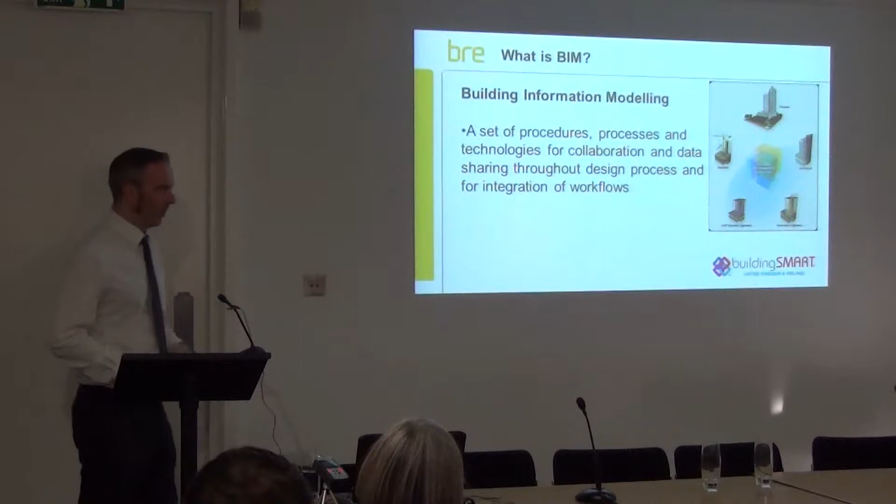So the types of data that you share in a building information model - I guess this diagram is the generic way of looking at BIM, or the building information model, and the collaboration between the different disciplines that collaborate towards that model. It can be anything from geographic information, spatial relationships, crowd flow, manufacturer details.

But more importantly, one of the important things that building information modelling formalises is the sharing and capturing of how this information is used throughout the process, using standards and protocols that are coming into use.

A building information model is meant to be used throughout the whole design process, from the building inception right through to whether you decide you do want to build this building or not, right through to the facilities management guy at the end who wants to change a light bulb in the building or make the room less hot.

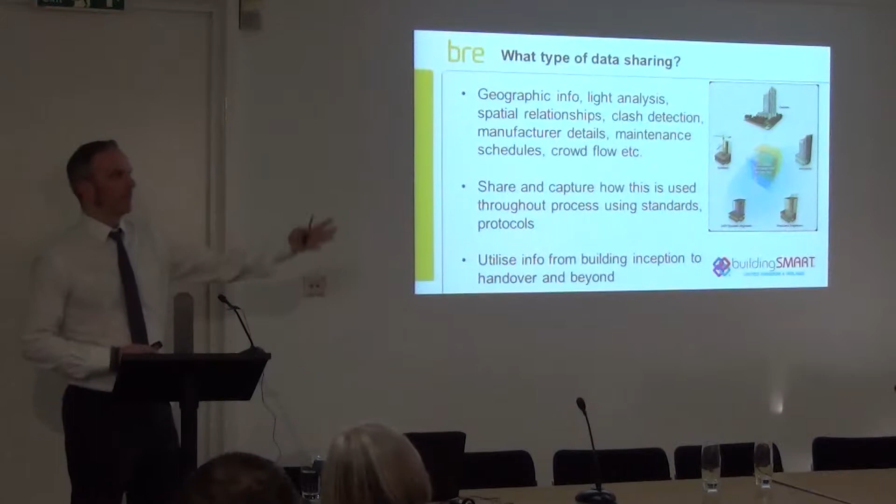So why do you need building information modelling? Well, in the UK, a big impetus for it is that the UK government has specified that it has to be used on all government projects over 5 million by 2016.

Francis Maude's statement, which you can find on the bimtaskgroup.org website, says the government's 4-year strategy for BIM implementation will change the dynamics and behaviour of the construction supply chain, unlocking new, more efficient and collaborative ways of working. This whole sector adoption of BIM will put us at the vanguard of a new digital construction era and position the UK to become world leaders in BIM.

Behind that is this rather plain document called the Government Construction Strategy, published in 2011. The central tenet was to reduce capital costs and the capital and carbon burden from the construction and operating of the built environment by 20%. A key part of that was that collaborative BIM, with all project asset information, documentation and data being electronic, has to be used on projects over £5 million by 2016 by the government.

So by 2016 this has got to be implemented. But one of the things is that we're already in 2013 - so how far are we towards that goal?

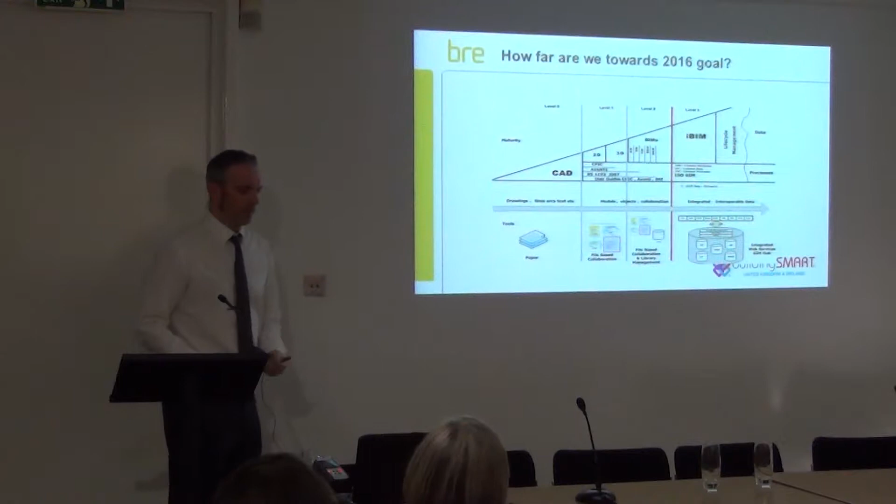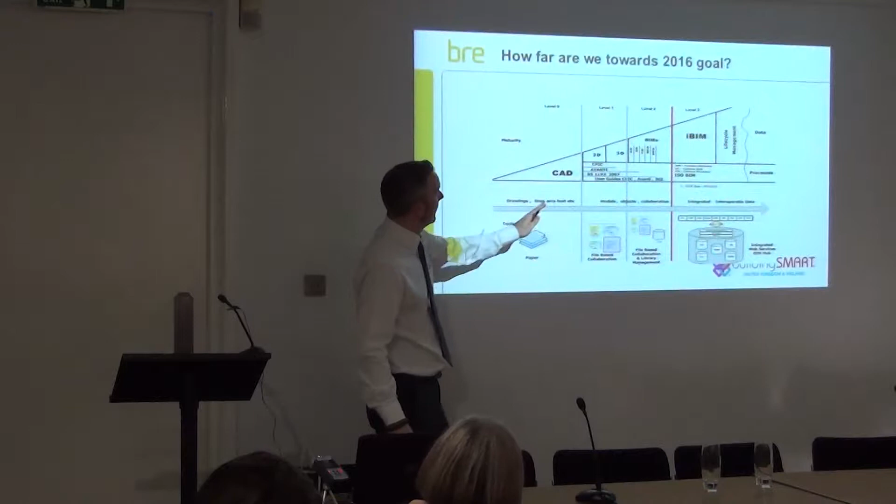Well, if you've ever looked at building information modelling, you'll probably have seen this diagram. It's called the Bew-Richards diagram. If you haven't looked at BIM yet and you're going to, you'll become thoroughly sick of this diagram because it's in every single presentation there is. But the idea of this diagram is to show the evolution of BIM towards level 3 and beyond. The government has specified that level 2 is where people will get to by 2016.

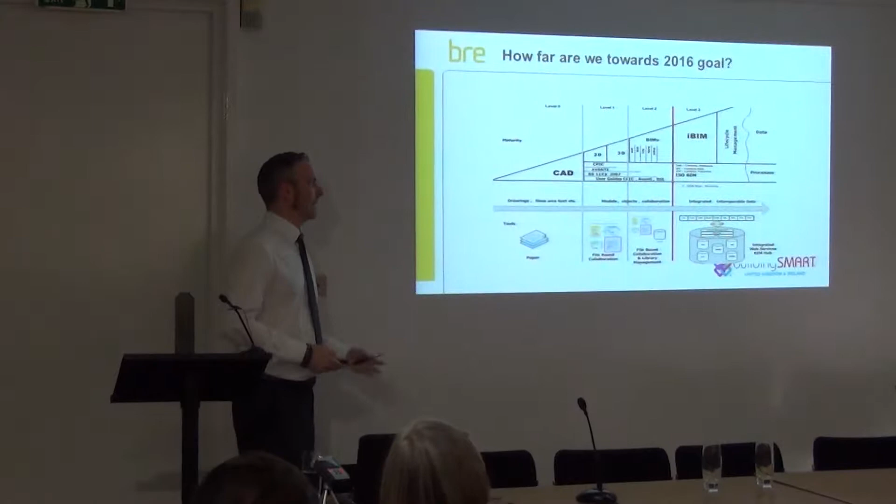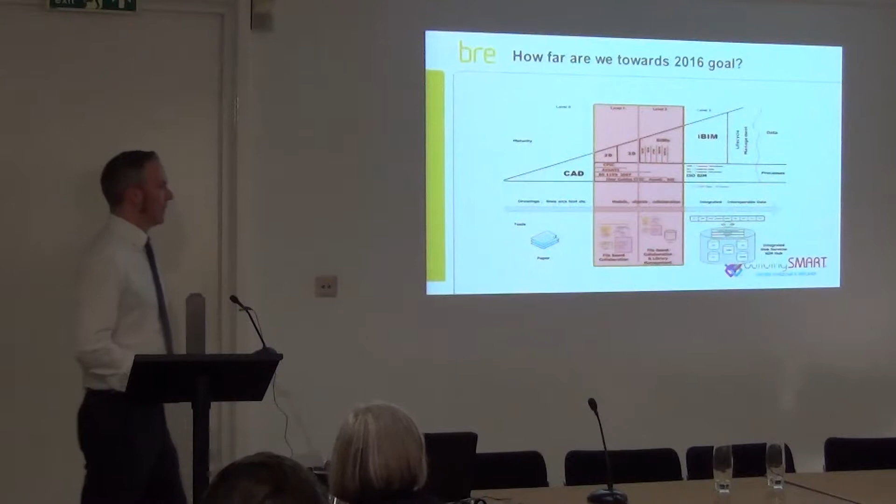Level 2 means every form of documentation, every model has to be electronic and in an interchangeable electronic format by 2016. Where we are just now, I'd have to say, a bit of a cop-out, is somewhere in that red box. That's really because there are bleeding-edge market leaders who are possibly beyond that, but then there are people catching up.

One of the things I said about building information modelling is that it's about protocols and standards. You can see this has really been taken up by the UK construction industry in terms of the protocols and standards that have come out recently.

For instance, you have the UK government's PAS 1192 document, a specification for information management on building information models. You have Uniclass, which I've been involved in myself, the classification system for the construction industry. You have the RIBA, who released the new RIBA Plan of Work 2013, possibly the biggest overhaul of the Plan of Work since its inception 50 years ago. And then you have a myriad of other documents from the Construction Industry Council, like the CIC BIM protocol.

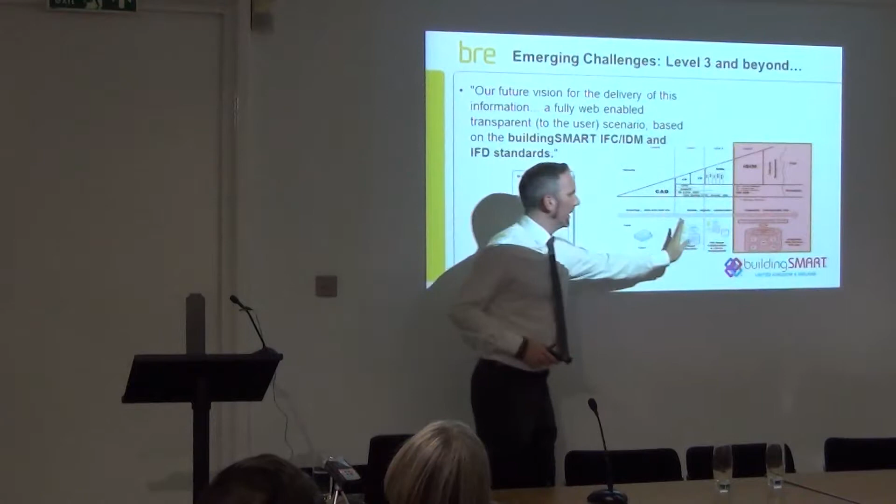That's just been renamed the Building Smart Data Dictionary, which rather ruined my slide since I had that nice diagram there. One thing I think with building information modelling is that the government has this set plan up to level 2 - everything has to be digital by 2016.

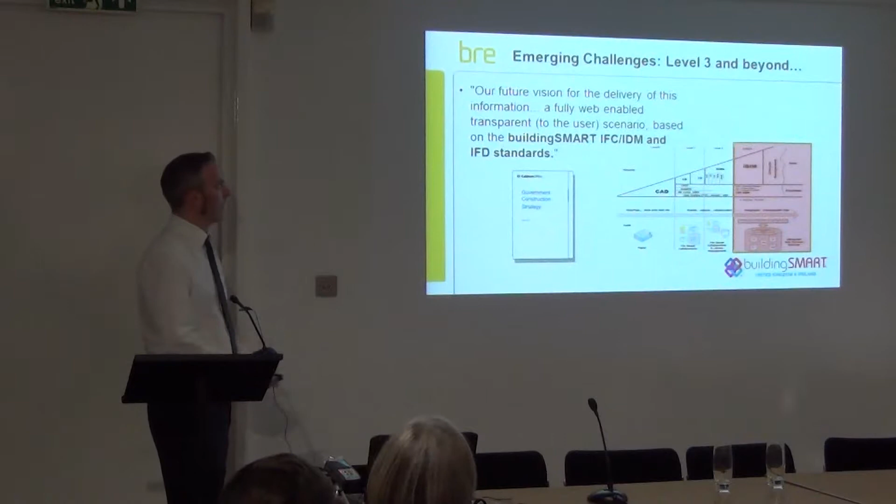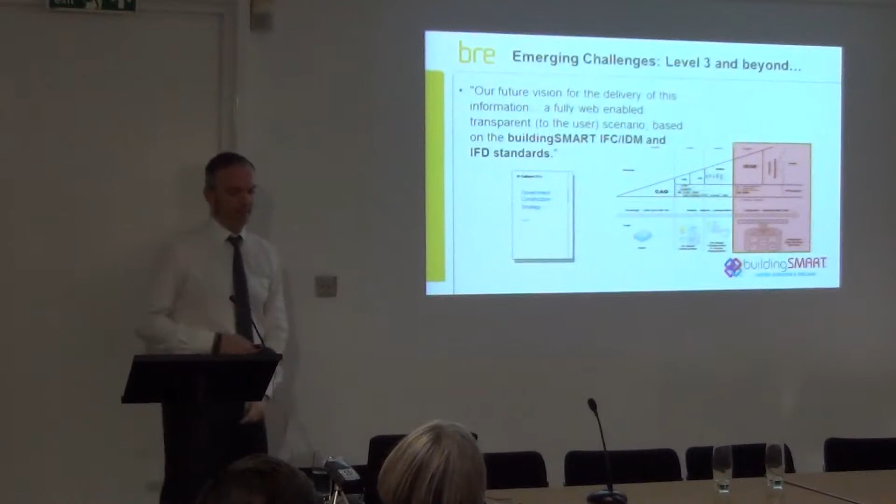But there's this area of level 3 BIM, which I guess you'd say is a bit up for grabs. The government construction strategy says about level 3 BIM that 'our future vision for the delivery of this information is a fully web-enabled, transparent scenario based on buildingSMART's IFC, IDM, and IFD standards.' But that's as much as it says, so let's make of that what you will.

Bringing it back to what I've been looking at in terms of metadata - if you look at a lot of the standards and protocols out there, they don't just say there's extra or new information that building information models will produce, but they actually begin to accumulate metadata about how that information is used, and the workflows involved.

For instance, in the PAS 1192 standard released by the government, you have the Common Data Environment, which tells you about how documents go through approved standards, how they become verified, how models become verified.

You have aggregation and provenance of information to get a BIM execution plan, which is one of the central things in the PAS document.

It's aggregating information and metadata, accumulating it as it moves toward the BIM execution plan. In the document, you have the information delivery lifecycle - the lifecycle of how the building information model progresses and develops. As it goes around that lifecycle, it accumulates metadata about whether it's documentation, non-graphical data, part of the graphical model, or even whether it's delivered to the client at each stage and what information they should get.

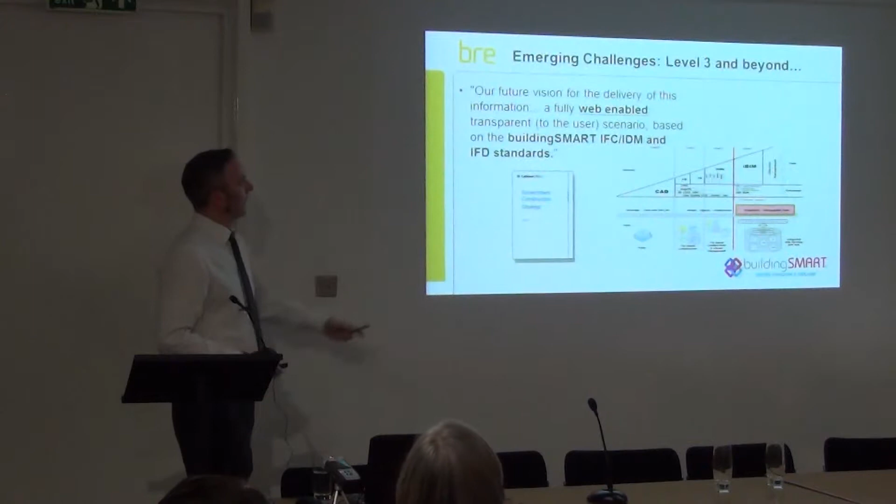The data from the processes and protocols is used to further enhance the models. So if I take as my premise that building information modelling and the emerging challenges are all about metadata of the model rather than recreating the wheel, what I did was look at what else I could find in terms of metadata, and from my background in computing, I looked at the idea of taking this statement that level 3 is a fully web-enabled transparent scenario.

I looked at the idea of Sir Tim Berners-Lee and the semantic web, and what he says is the semantic web provides a common framework that allows data to be shared and reused across application, enterprise and community boundaries.

Sir Tim Berners-Lee is the inventor of the World Wide Web as well. I guess that's apparent.

But also he said, to paraphrase, in other forums, that the semantic web is the web done right. And the idea is that he looked at the semantic web and its implementation as linked data.

In his TED talk in 2009, he talked about linked data as the idea that every piece of data gets a unique URL or unique ID on the web, and the data is there just the same way as you have a document on the web just now that you can read.

You have data that's on the web at a unique ID or URL, and that data can be read by a machine. One of the important things about that is that the data stays where it is, but the links between the data become important, and those links often represent the metadata about that information at that unique ID.

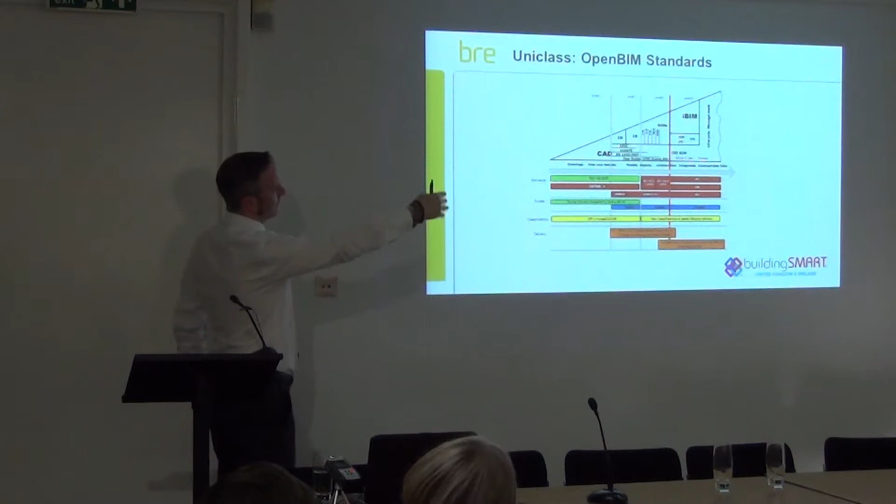So what we looked at was that if you have a classification system which is only up to level 1, we thought we'd look at semantic web techniques and make the classification system, the CPIC classification system, open and available in as many formats as possible and reusable, and hopefully fit for level 3 purpose.

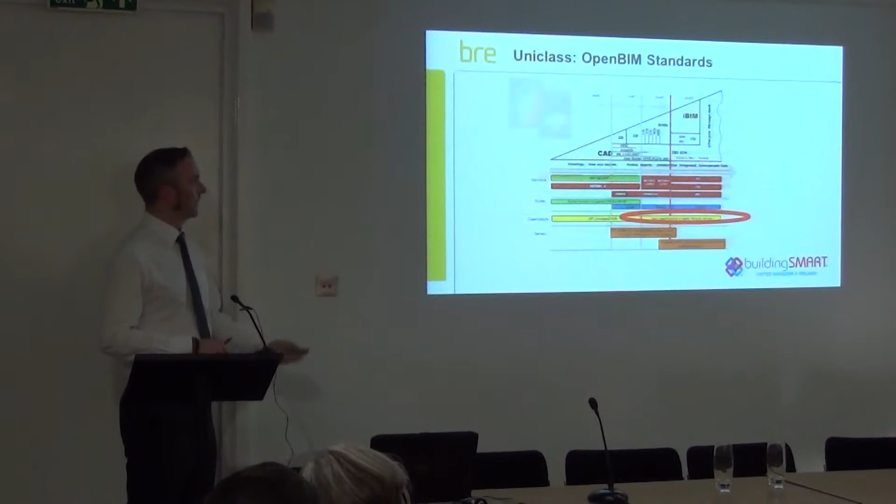So what we did was take Uniclass and the Common Arrangement of Work, and moved it into an open data format, and put that onto the web. Now we have Uniclass and the Common Arrangement of Work available through an API as an open data repository on the web using RDF or SKOS.

We have a number of different formats that use that repository through the API. So we have it as a searchable tool, as different visualizations, and as a very, very buggy Android app if you wanted to try it.

We also have that information available in as many formats as possible, so XML, JSON, just normal CSV files, and we're talking to Autodesk and ArchiCAD to make that data available in a format that they can read too.

If you want to have a look at it, we have a fully versioned repository at cpic.org.uk, where we store historical revisions and metadata about the terms, the revisions, the provenance of that data. We have an API, and it's downloadable as CSV, XML, JSON, and just as plain text.

We've been looking at a semantically enabled SKOS version of the Uniclass system. The idea is that we're looking at this because we believe that it's toward the level 3 goal of BIM, which is integrated interoperable data.

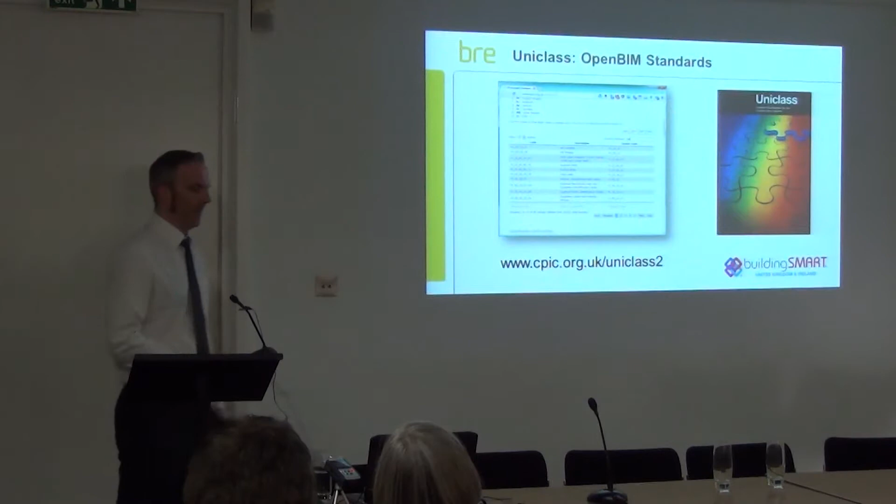Just to summarise, I talked today, I guess, about BIM and achieving the level 2 targets by 2016. BIM seems like a new sort of area or a new discipline, but I don't believe it is. I think it's just looking at the idea of metadata and provenance around building information models, or around CAD modelling.

And what I've described is using some existing technologies from other disciplines to look at level 3 BIM as linked open data. It might be that we've just taken a small part of it in terms of a classification system, but we've made an open, reusable classification repository.

We put this repository up on the web three weeks ago now, and it's had about 12,000 downloads and views. So it's not just me that's doing it. There is somebody else hopefully using it, although probably about 10,000 of them are me.

If you want to know more about BIM, the UK Government's BIM Task Group website is an extremely good resource to look at BIM and a very good introduction to building information modelling. If you want to know more about the open side of BIM and open standards, buildingSMART is a very good place to look at. And if you want to know more about the Uniclass system, go to cpic.org.uk. Okay, thanks.